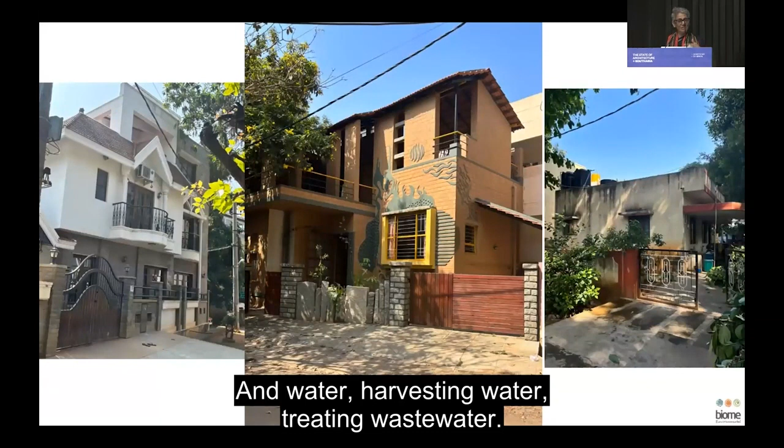But all this done through the tropes of the mainstream, making estimates, creating a tender document, creating bills, all that for materials which were not available in the CPWD and PWD manuals. So everything we had to almost invent ourselves. And at the same time, walking the talk. And that happened through building our own house. That was helpful. That's where all the experiments happen, and they still happen. So we call it a lab for life.

And then conversations with the future home owners, home builders. And one of the things that really helped, because walking the talk, but also it's a woman architect who's going to design your home as well as help you build it. So coming with a team to build, not saying, oh, I'll design a mud thing, but I'll ask who can build, I will find out workers or vendors. No, I come with the possibility of also building it for you.

And then at the same time, creating a big team of clients who are supporting the project by word of mouth, contractors, masons, electricians, plumbers, and now a team of well diggers. So in 30 years of practice, with now an office of 30, we have built about 40 lakh square feet. You know, everybody asks how many, and everything is in this lakh of square feet. So we thought we should also put in the number, and it comes to quite a bit. So we're chuffed, yeah.

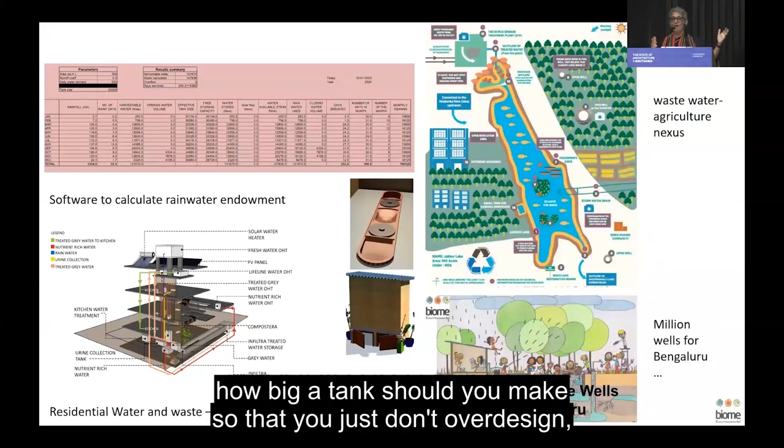But it also is along with water, designing for water for homes, for parks, housing, layouts, or connecting the city to the hinterland, taking the treated water from the city to Kolar, about 100 kilometers away, filling up lakes and using it for agriculture. And in all this, you had to create ways of doing it. And so here is a software to calculate for rainwater harvesting, how big a tank should you make, so that you just don't over design, you don't under design, or you design a WC pan.

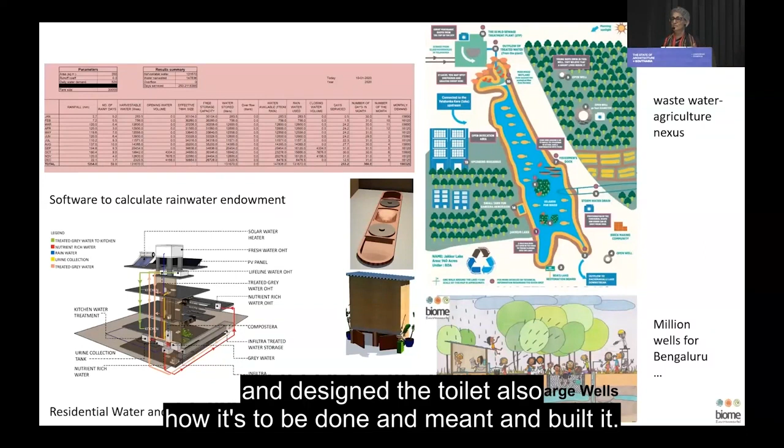So Biome has designed the product, an EcoSan toilet, in fact this was for Kosi flood areas, and designed how it's to be done, and went and built it. Or you get into a campaign mode of making a million recharge wells for Bangalore. So it's these two processes coming together in our practice, which is building with earth, mostly stabilized earth, and working with water. And the reward which we cherish most is when the client says that he has low bills, low water use, and no waste, and it's all because they met Biome.

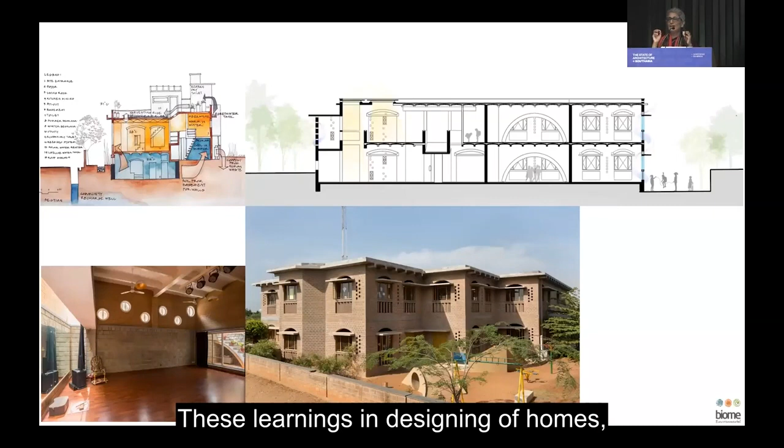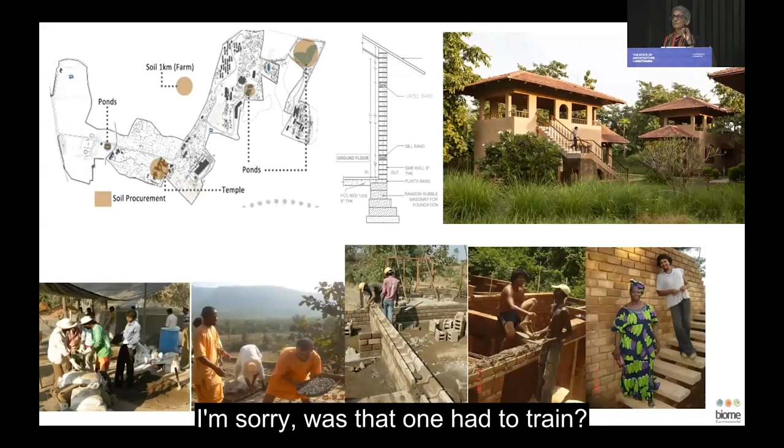But these learnings in designing of homes, we could transfer to even larger projects. So that's a school or any other projects. Every time looking for, how do I use earth for construction? And then larger projects and in different geographies. So Palghar in Maharashtra or Port Harcourt in Nigeria, building with earth. But what it really required all the time was that one had to train. Training was the essential aspect. You say that you will build with earth. Now you've built a base that says build with earth, but then how do you translate it on ground? And for that, we had to go to the places.

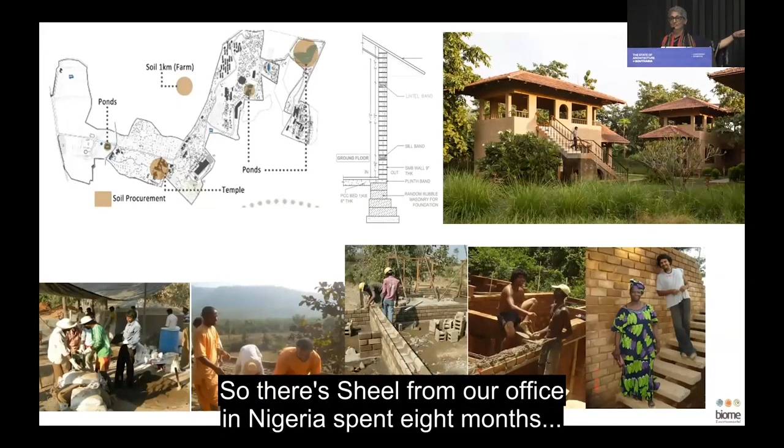So there's Sheel from our office in Nigeria, who spent 8 months training Liberian migrant labor how to make mud blocks and then build there, leaving a legacy. Now we have a contractor there who builds other buildings, but with earth.

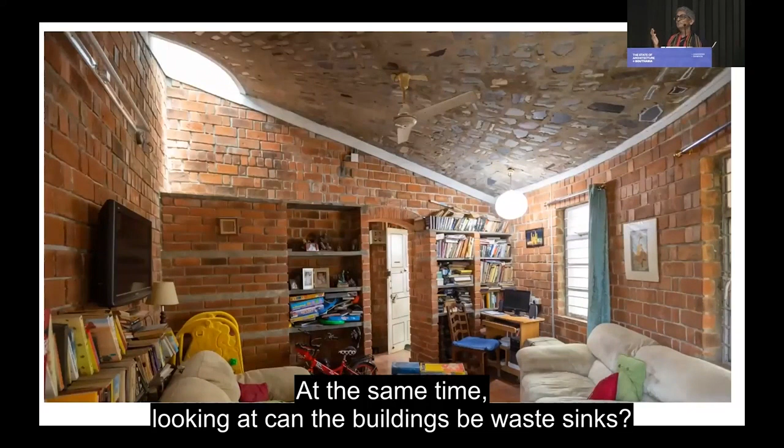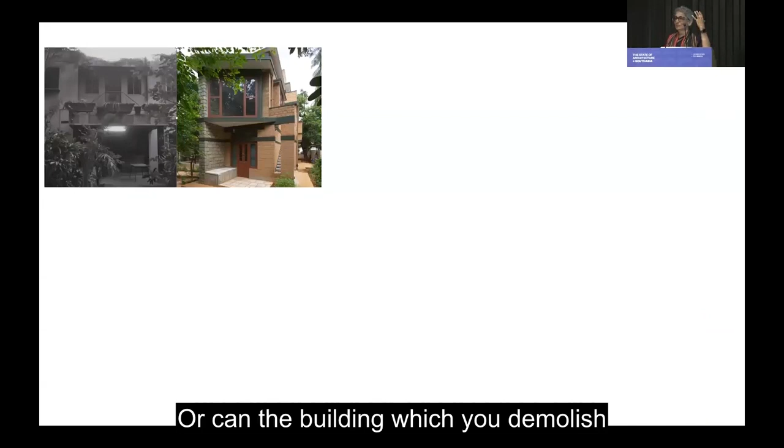Or can the building which you demolish itself use its own waste for structural purpose?

I'm sorry, my animation is very bad. Huh? I thought I learned new tricks.

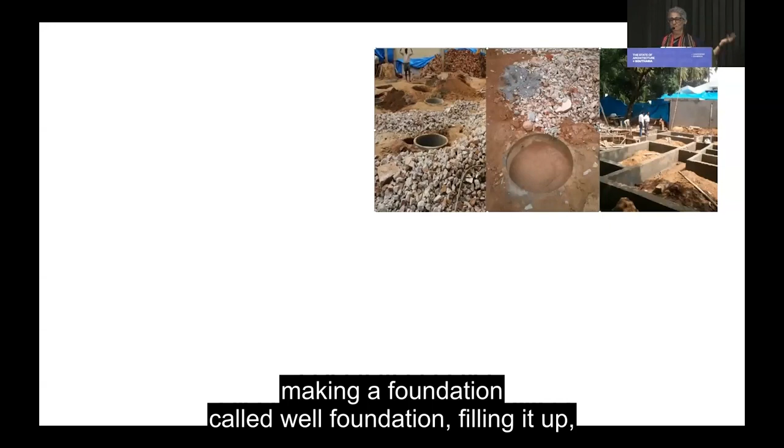So using the construction debris as a structural material, making a foundation called well foundation, filling it up, and then making a grade beam above it and making the building. So in fact, the stone walls which you see are the earlier buildings' stone foundation. So you get a very nice facade, you get to use the same material and save costs.

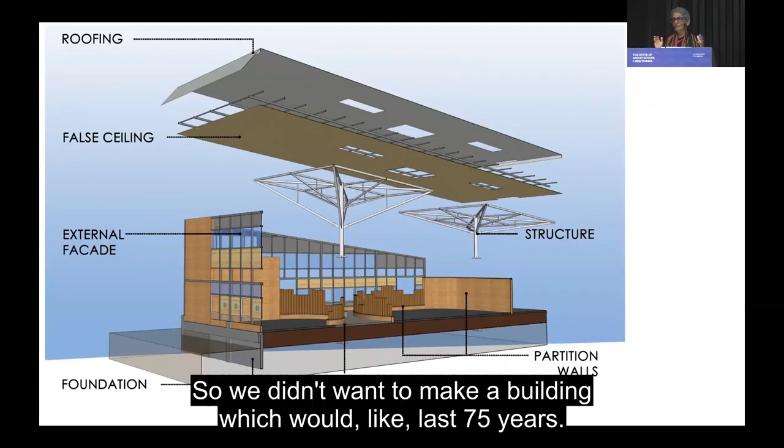And then looking at, can we make a building for being a quarry of the future? So this was a project where the land was available for just 5 years on lease. So we didn't want to make a building which would last 75 years. So can we make it so that every unit can either be removed, reused, or the whole building can be transported in pieces and put up somewhere else?

This starts with the foundation. The foundation is of stone chapri, which Senthil introduced us to, the walls of earth blocks, and a mix of all materials, aluminum, wood, and also paper. In a school of 10,000 square feet, the classrooms are organic in shape, but to reduce the reverberation, paper tubes.

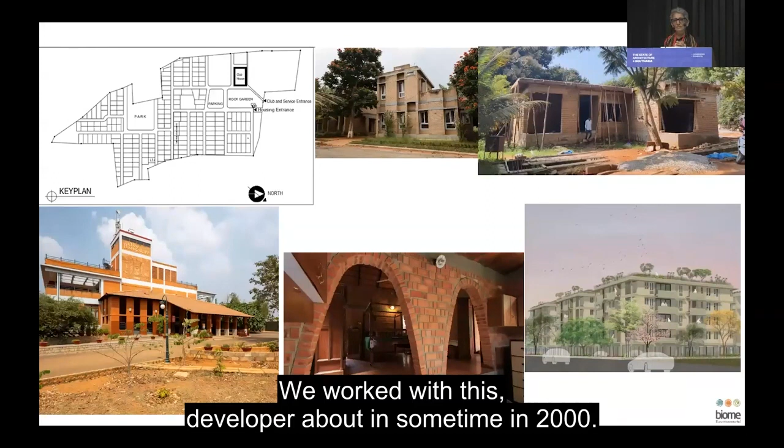So then what's next? And this is in this world of developers one is moving into, which is so well ordered, but is there a space for contingency? And that comes from the experiences. So yes, we worked with this developer sometime in 2000. He couldn't battle the bureaucracy processes. So he ended up cutting the land into Mysore paks. We'd come from the south, so it's Mysore Pak and not Burfi.

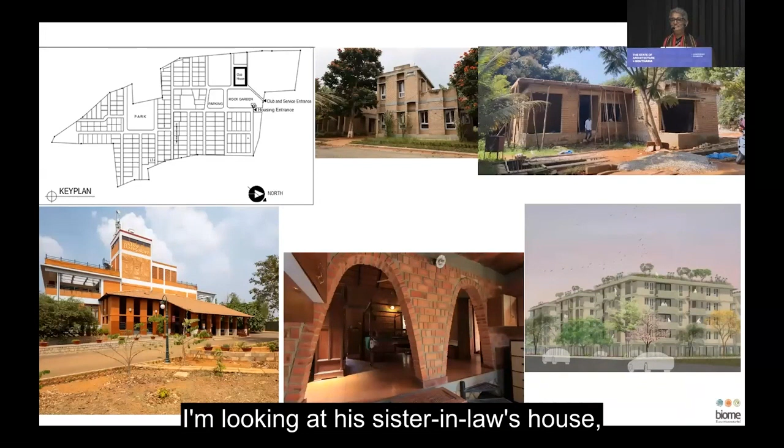But we made his house, the clubhouse, his father's house, his sister-in-law's house, while we also attempted designing apartments for senior citizens. But we were only designing homes in the layout he made, so we made about 20.

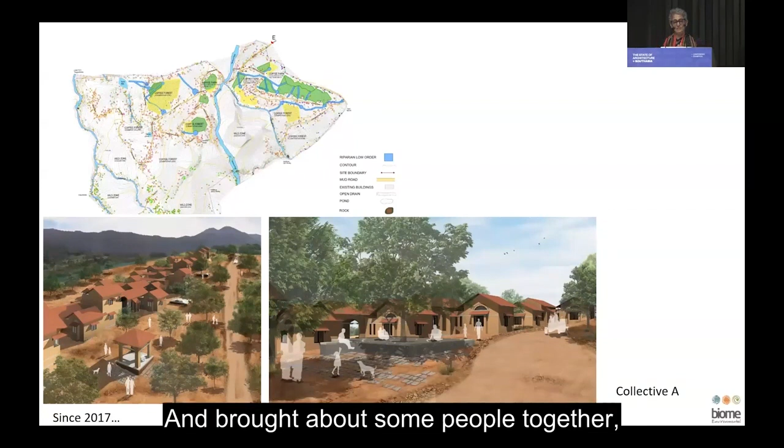But then we came to this project, which was brought together by an environmentalist friend who talked about how do we build in future, how do we live in future, and brought some people together. And they formed a collective. The collective helped in changing the way people thought that a home should be in one particular plot, and then we can do farming.

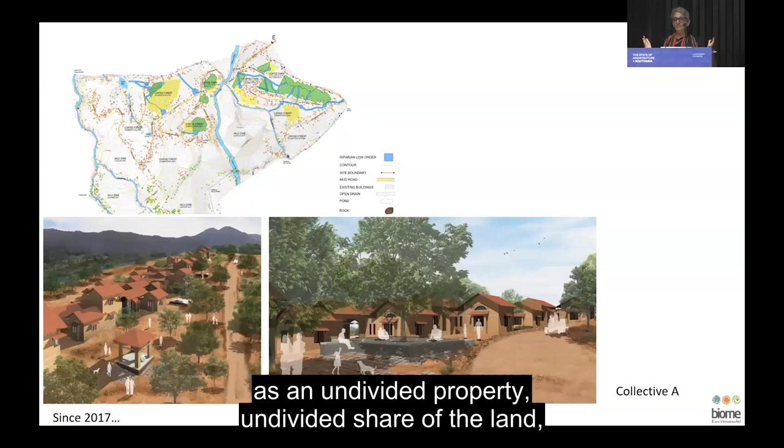But by understanding the site, my colleague Sharat Naik, who is mostly involved in this project, brought about an idea saying let's look at the whole land as an undivided property, undivided share of the land, and you build in smaller parcels so that you have available land for agriculture. But the builder wasn't really that smart. He got trapped in the license agencies, and we have problems with continuing.

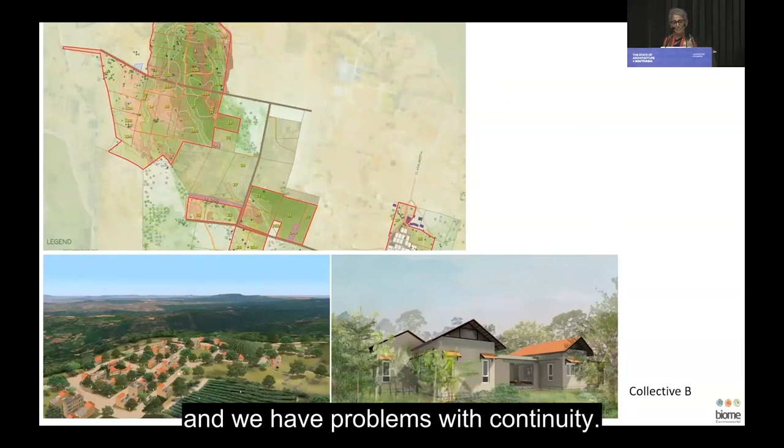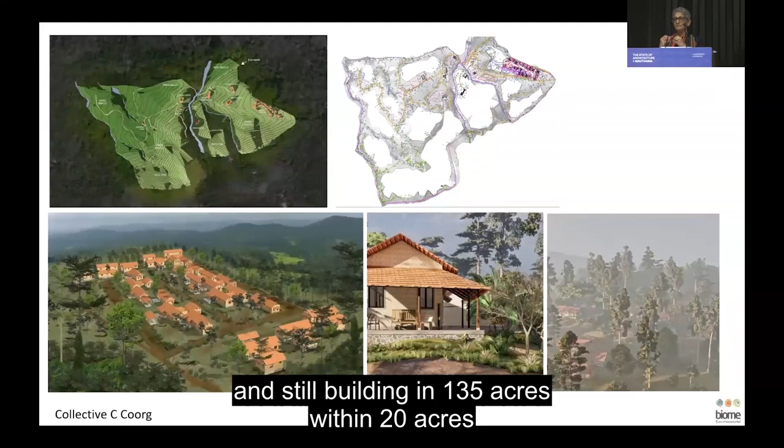So this is the next project the builder is doing. He's smarter. He turns it into smaller plots as well as clusters. And at the same time, we do a project in Coorg, different geography, different context, and still building in 135 acres within 20 acres, reducing the cost of infrastructure.

But a builder or a developer with deeper pockets helps us to design better. He agrees to reducing the whole land use by 20%. So 20% of the plots were reduced, but he has deeper pockets and we are able to do something better. But in all of it, for us, it's always been to teach construction, even the basics, all the way to making a masonry foundation.

But this is the fun part of it. Here, Vidushi, who is involved in this project in MP, knows every little home in the village. This is in MP, where the MP Tourism Board is making one-room Airbnb sort of things in the villages. And we draw the designs in Hindi, and we also know the local village dialect, and Vidushi knows every plumber too, and they call up and discuss. So this is what I feel the most happy with.

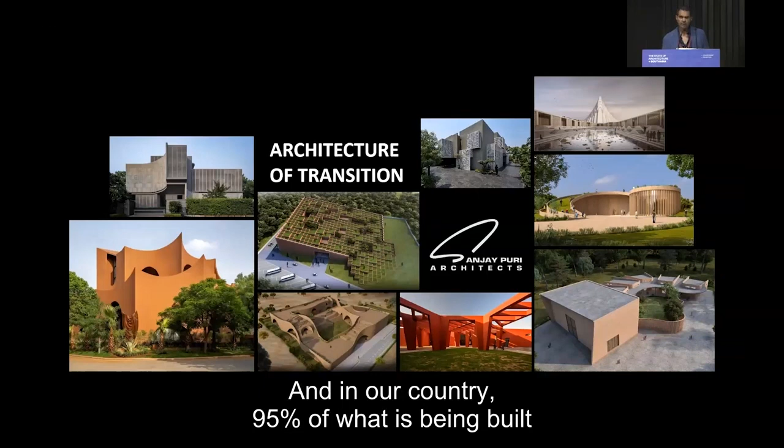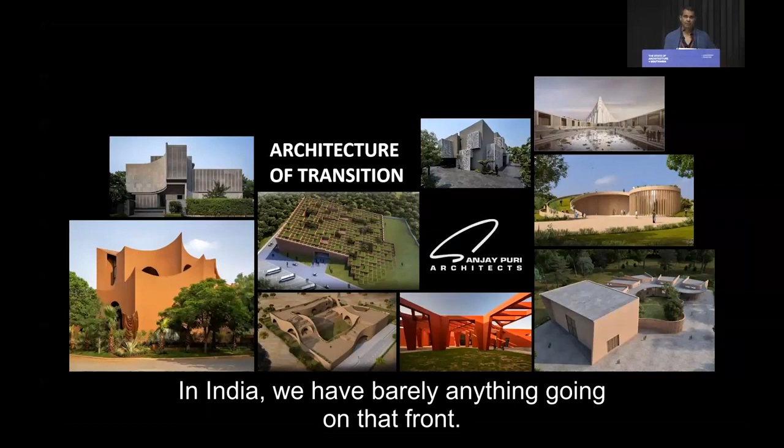So we started our career with private developers. And in our country, 95% of what is being built is by private developers, unfortunately. Unlike most other countries where the governments fund community centers, schools, cultural centers, museums, all of that. In India, we have barely anything going on that front. And whatever else is happening, you know how many loopholes there are to get those kinds of projects.

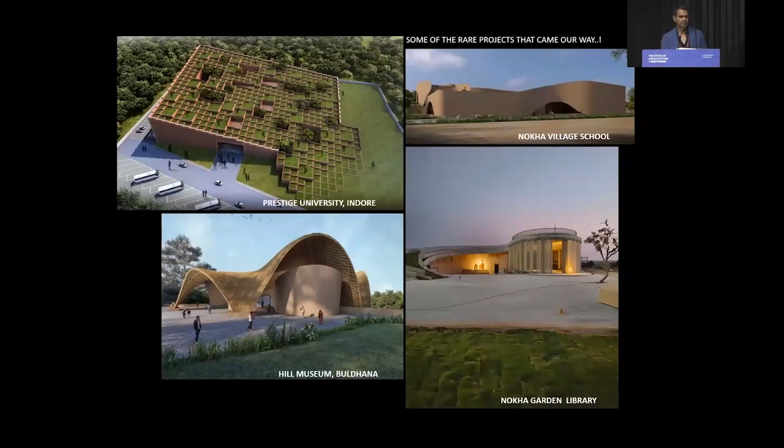So in some cases, very, very few, this would amount to less than 1%, you actually get a chance to do something that is interesting. Are these where we're building a university or a museum or a school?

But largely, it's all private development. So we can leave it at that. That's saying I will be the true architect and not do private developers' work, and I will stick to waiting for that time when I'll get that one opportunity. Or you work with a private developer and you convince them to do something that is unique, something that is different, and something that is more meaningful.

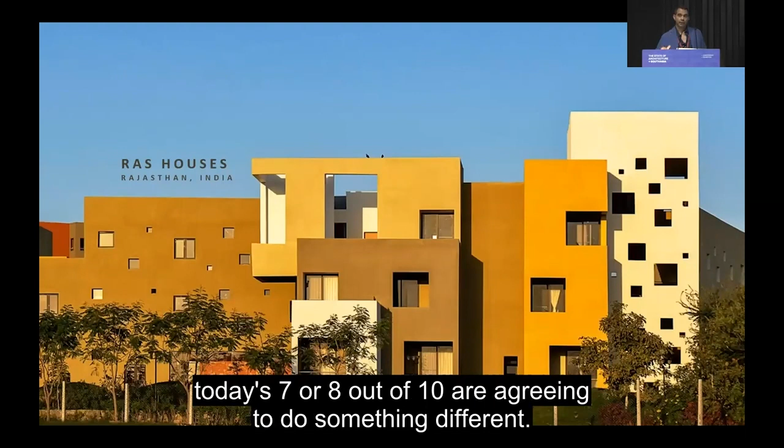The failure rate is very high. At least that is what it was. But after having finally done some projects, the failure rate has gone drastically down. So where we earlier had 1 in maybe 20 who would agree, today 7 or 8 out of 10 are agreeing to do something different. And each one of these projects has actually got us 10 more people like that saying that, yes, I also want something different. So this is one of those projects, Ras Houses, is for a cement plant.

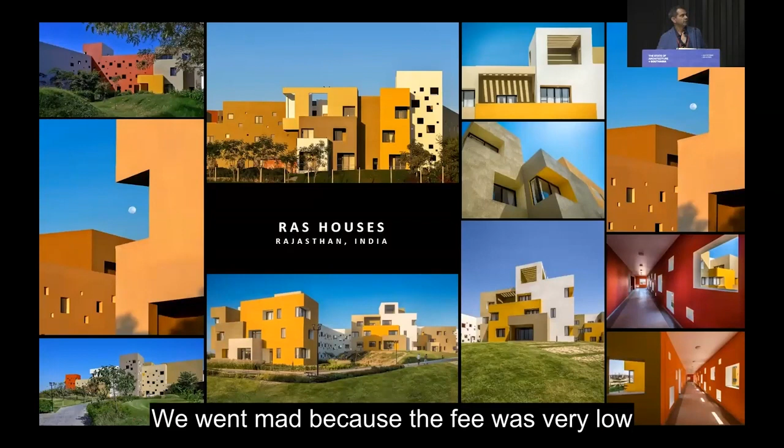It's a housing which negotiates land contours of 16 meters in a 100-acre site. Not a single spade of mud was taken out or brought inside. We went mad because the fee was very low, because they expected that you'll do a single unit and then you'll repeat it. And we told them no. In fact, the first call we got from the engineer was, can I start leveling the site by the time we make the drawings? So we said, no, please don't level the site. He said, but then it'll become very complicated.

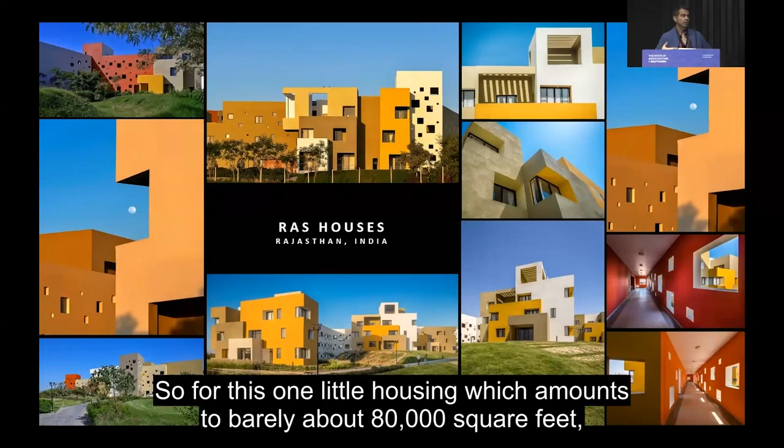I said, that's okay. So for this one little housing, which amounts to barely about 80,000 square feet, within that 100 acres, just one part, we had to make some 140 sections at various parts. So somewhere you enter the ground level, you go ahead, and then there's a lower level. Somewhere you go up. Very, very organic in nature, deep recessed windows, the contours absolutely as they are. And the project came out really interesting.

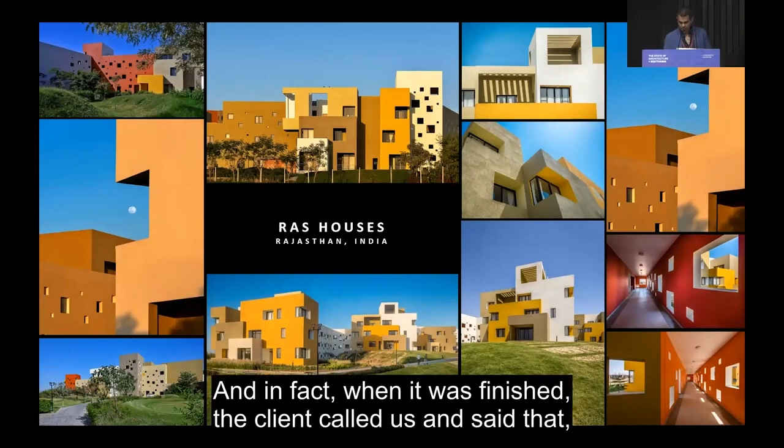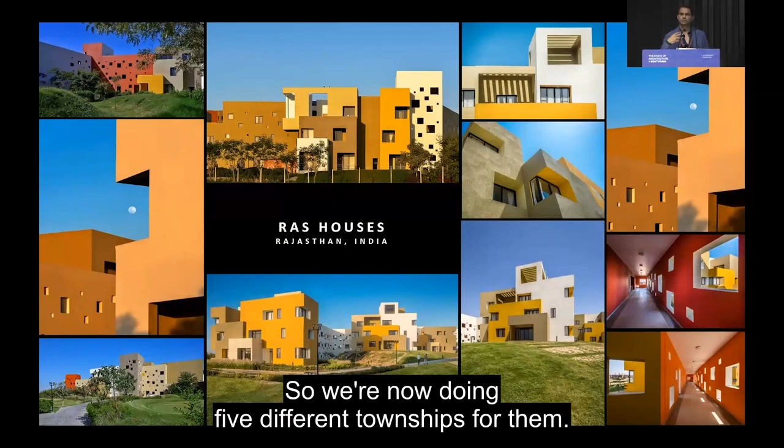And in fact, when it was finished, the client called us and said, ye aapne kya kiya hai, you know? He said, for the first time in a new cement plant, without the school operation, without the club operation, people want to move there. And because of this one little thing, they got convinced. So we are now doing 5 different townships for them. And in each case, they are allowing us the freedom to go beyond the cookie cutter building and make something new.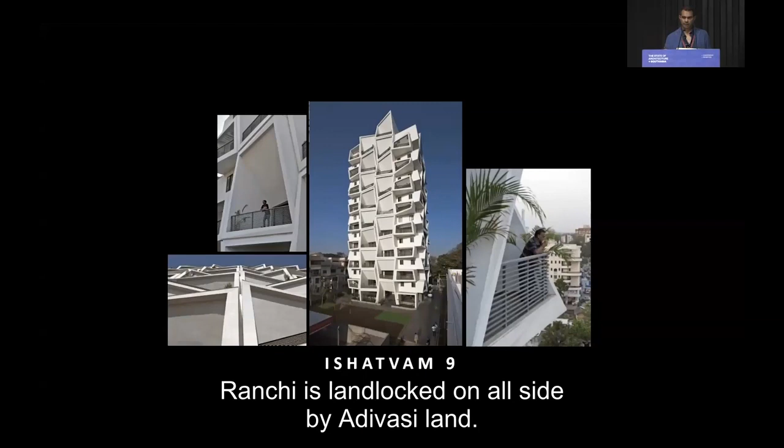This is another project, very small plot, only 2000 square meters. And in this case, we were lucky it was a new developer. So he said, "What do you propose?" So I said, "I've been coming to Ranchi." This is in Ranchi, small city in Jharkhand. And I've seen a lot of these residential buildings which are unoccupied. And I've spoken to people. I said, why are these buildings unoccupied for 10 years? Now, Ranchi, unlike most other cities like Delhi, which is just growing, growing, growing. Ranchi is landlocked on all sides by Adivasi land. So land prices have gone literally 20 times within a span of 10 years in Ranchi. And more than that, it's not available anymore.

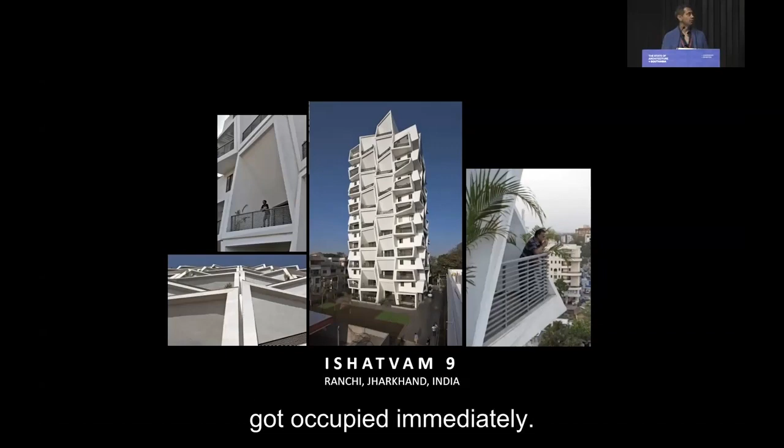So this guy has a small plot. And I said that you're making buildings like Delhi, Bombay, Hyderabad, Bangalore, which don't breathe. Sorry, it's not all. I'm just saying general. 90% developers make buildings that don't breathe. So I said, here you got to make an apartment where every single room opens into 24 feet high terraces. And that's what made the difference. This building, unlike those which remained unoccupied, got occupied immediately. And the balcony where this guy is standing, he was the first occupant of that building.

And he gave this honest feedback, which I still remember, saying that, हम 3 साल से बिल्डिंग देख रहे थे. We never found anything that was open. It's the first time we found something that is open. So I bought 2 flats instead of 1, and I've connected them and made a duplex.

So people think that this is an elevational thing, but there is this twist which is done for a reason to each window frame. So what happens is, in a small plot, you can't actually create terraces because the building will go out of the site. So these balconies, by their twist, are half shaded, half open. So you have the choice from your room to stand in the sheltered part or go out in the open part. So it's a balcony that doubles up as a terrace.

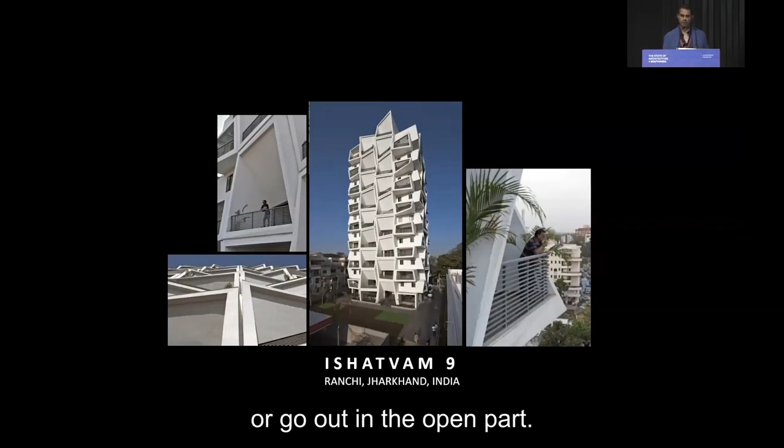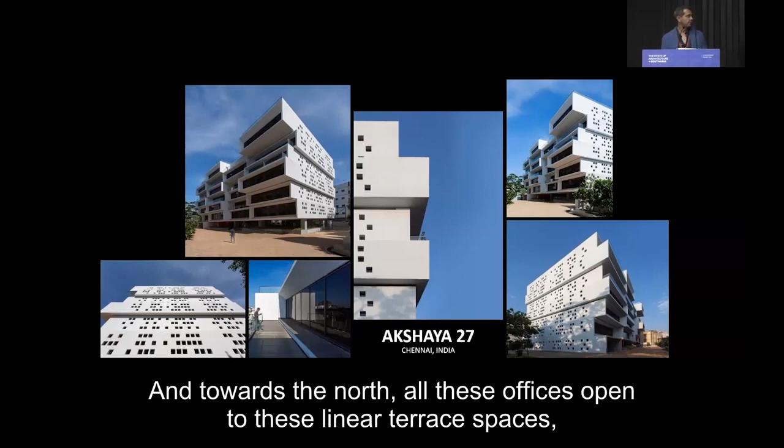This is another case where a real estate developer from Chennai wanted a glass office building. I don't know why everybody wants to make glass office buildings, trapping heat, increasing air conditioning. So the entire service core is taken on the southern side, and towards the north, all these offices open to these linear terrace spaces. And we had a lot of arguments where initially he said, why are you making terraces in office buildings? Nobody does that. Nobody's going to use it. But this office building has been very successful, and we are now doing 3 other projects for the same client, who has now opened up still further and said, now make bigger terraces if you want, because we realized that people like this.

This is another case where the client was a developer, so it's not a hotel person, it's a developer. So developers think very differently. I want to make a hotel, this will be my first hotel, but I want a very simple building, very clean, box windows. And here we convinced him to do a building like this, which again steps up on this terrain. There is a 9-meter drop from the bottom till the top.

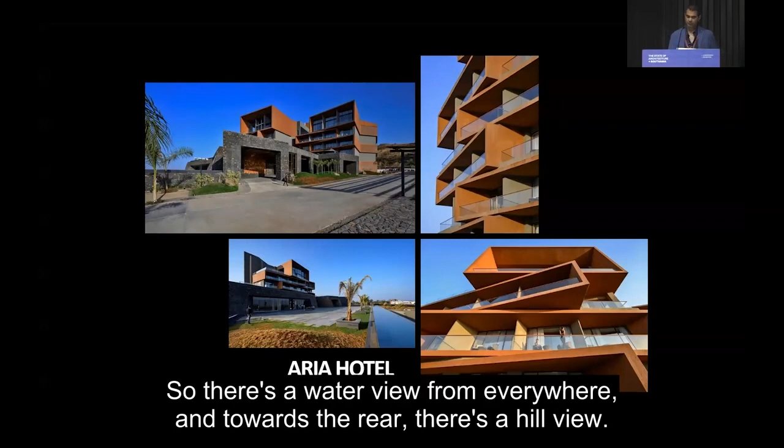Each room opens into 8 feet wide decks overlooking a huge Gangapur dam. So there's a water view from everywhere. And towards the rear, there's a hill view. We got the most sustainable hotel design in the world award for this. 40% of the walls are made in local stone. 55% of the building is non-air conditioned. And out of the energy that is used, 50% comes from solar.

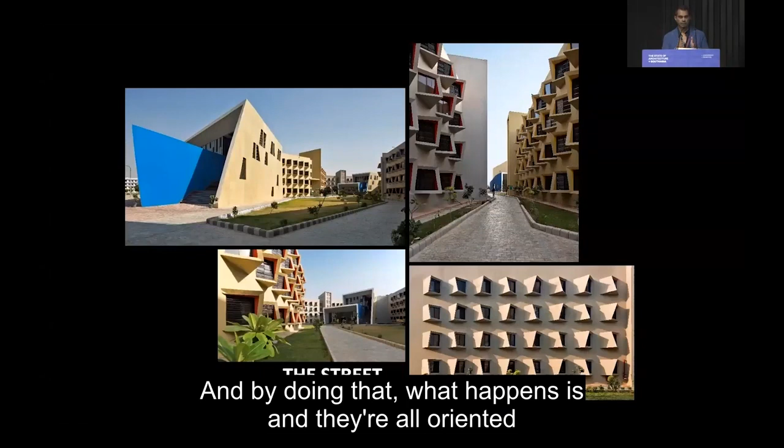And this is the street. It's an 800-room student hostel designed in a really organic way where buildings weave together, they move away. And by doing that, they're all oriented along the north-south axis, so that at any time, and I've seen this, there's always a substantial shadow, like 50% of the garden is in shadow at any time of the day, either on the left or on the right, whichever path you're taking.

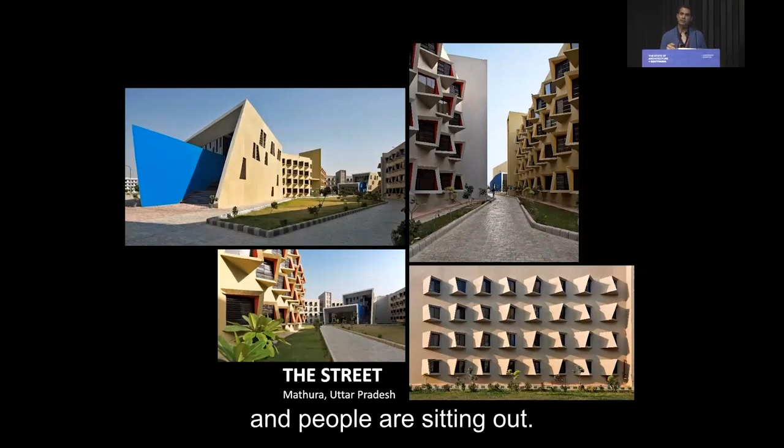And people are sitting out. It's 40 degrees Celsius. People are sitting out in the garden and are able to enjoy it. Of course, for all these, there are multiple projects that didn't happen. Like I said, the success ratio was 1 in 20 maybe in the initial stages. But now we are doing these kind of projects.

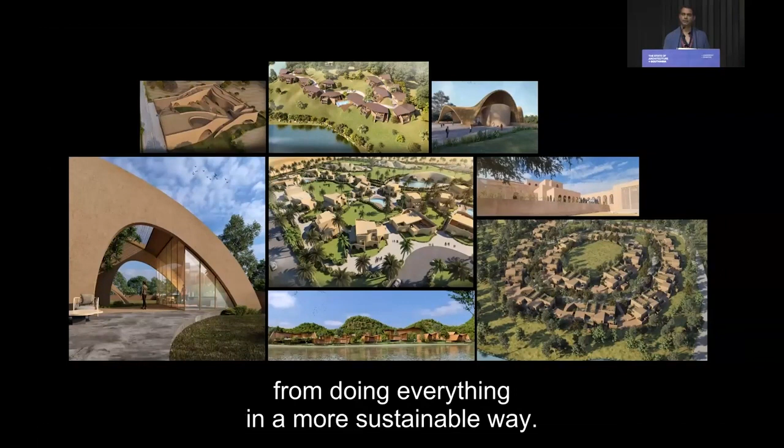So not only is there this whole transition of taking a private developer to make something more meaningful, at the same time, there is this transition to doing everything in a more sustainable way. So these are some of those projects which are now under construction.

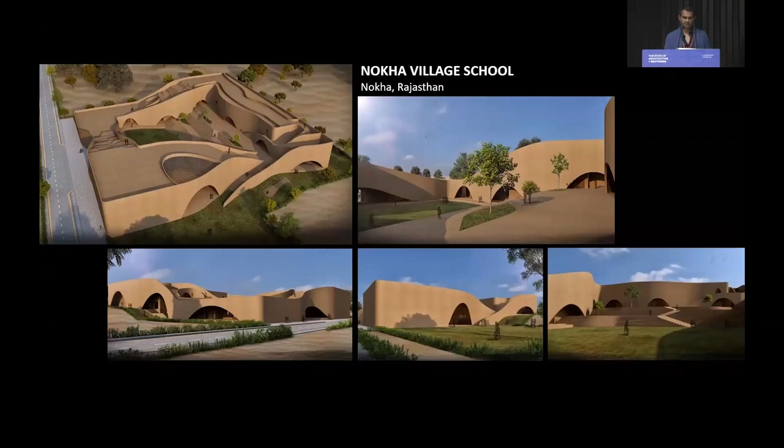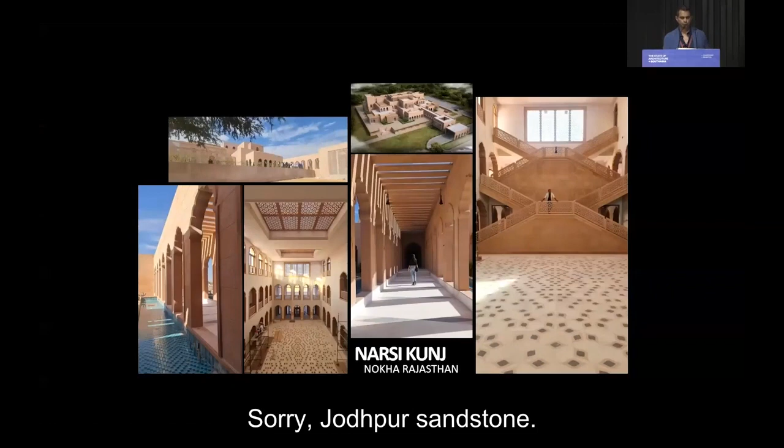That is a house that we did. It's actually a very large house, but it's built totally in local sandstone in Jodhpur. Sorry, Jodhpur sandstone, the house is 35,000 square feet, built with natural courtyards everywhere surrounding the house, a large central one, and a lot of sheltered spaces. And this house is now occupied for over a year. If you walk into this house and it's 35 degrees outside, you don't need air conditioning.

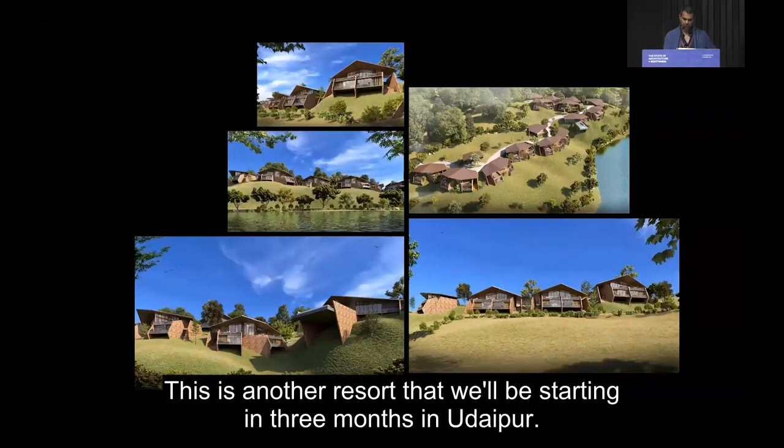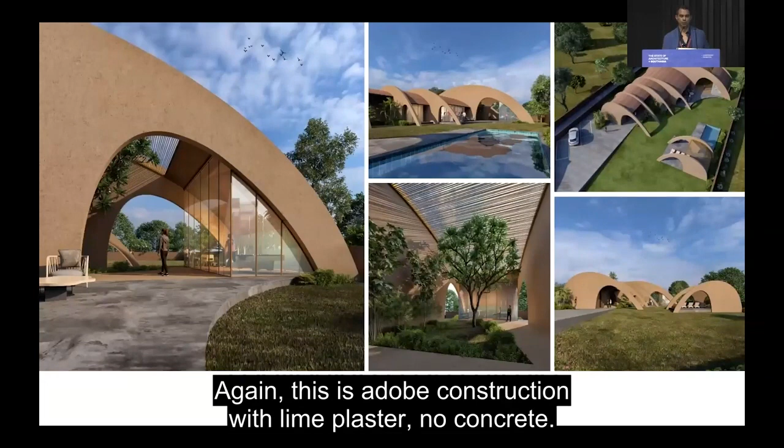So every house is situated on those contours, and these are modules of 6 rooms, 4 rooms, like a villa resort. This is another one that we're doing in Jaisalmer. Similarly, all ground plus 1, adobe construction, lime plaster. That's another house in Gandhinagar we're doing. Again, this is adobe construction with lime plaster, no concrete.

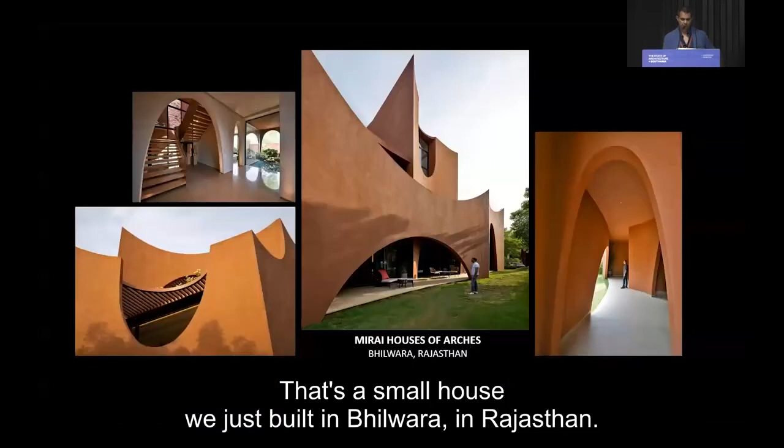That's a small house we just built in Bhilwara in Rajasthan. All lime plaster, all local labor. This one is in Jaipur. Again, a lot of interstitial spaces. And this is the Rajasthan school built in Rajasthan also for this developer. So, like I mentioned, the Ras houses is part of the same project where, because of seeing the success of that, they allowed us to go beyond and do something which was more unique and interesting.

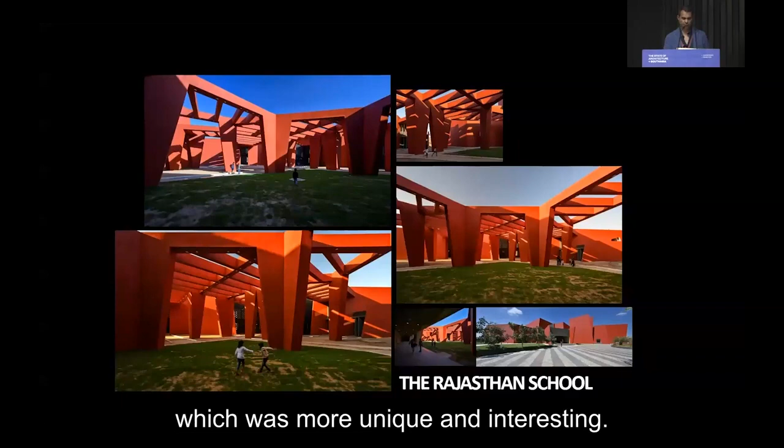So to summarize, private developers are here to stay and they're constantly going to be there. But I think you can turn them around and make something more meaningful, however commercial minded they are. And at the same time, we need to move towards creating buildings with more sustainable materials.

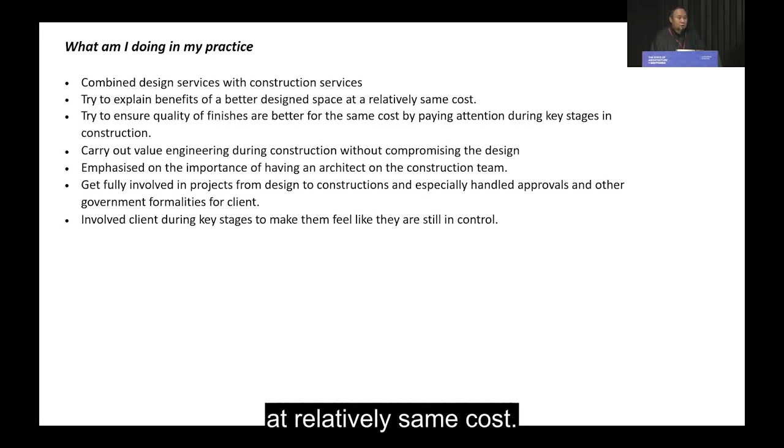So with this, when I started my practice, I wanted to combine a few of these services. I combined design services with construction services. Tried to explain the benefit of a better design space at a relatively same cost. That was very difficult to convince because clients always think that as soon as you involve an architect, then the price is just going to go up. Then trying to ensure the quality of finish is better by just paying attention during key stages of construction. I feel that makes a lot of difference during construction. And then as an architect, we could carry out value engineering during construction without compromising the design aspirations. Like we could use a cheaper tile option or a cheaper stone option without really compromising or changing the design language.

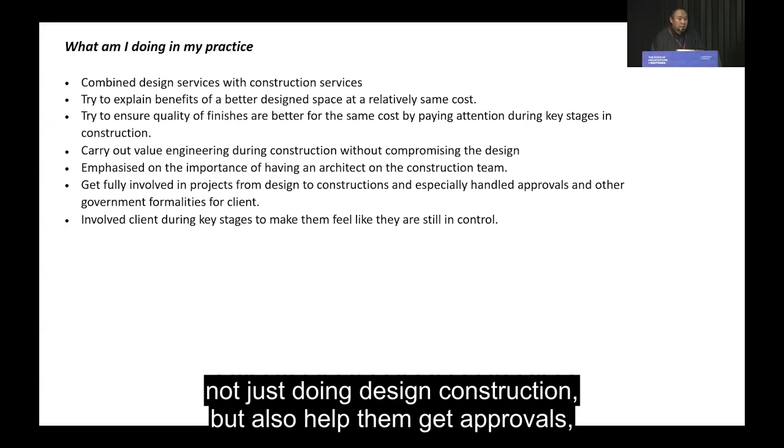Then construction time, the importance of having an architect on site or on a regular basis, I thought that made a lot of difference. So we tried to emphasize on that. We got fully involved in projects with the clients, not just doing design construction, but also help them get approvals, try to understand and make them understand about government regulations and also all these other formalities, because we noticed that some of the architects, just to get projects, were trying to convince the clients that it's very easy to bend government rules and regulations.

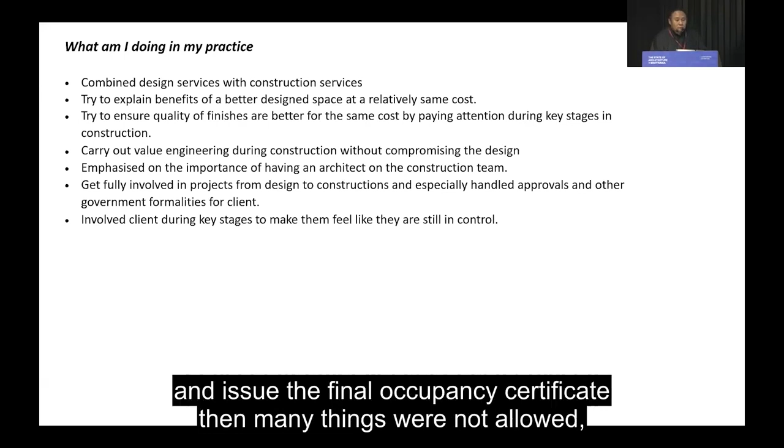And at the end, when the construction was finally over, when the regulators came to verify and issue the final occupancy certificate, the clients realized many things were not allowed, and the clients ended up paying a lot of fines. So we never encourage that with our clients. We try to educate the clients of the existing regulations and the formalities, and within that framework, how we can push the boundaries and make them feel like they're benefiting the most from their project.

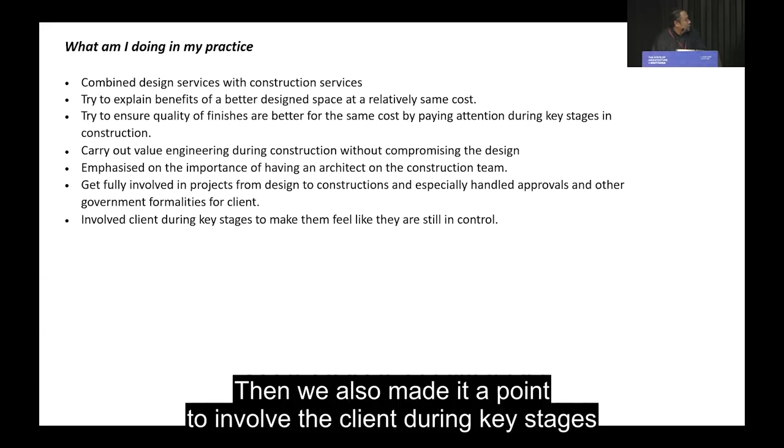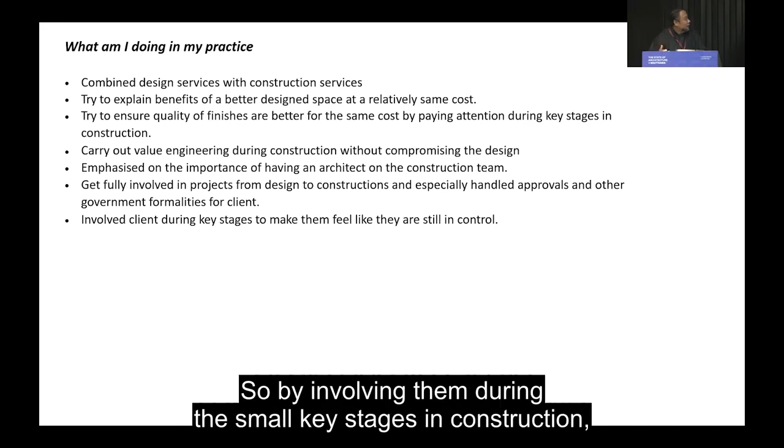Then we also made it a point to involve the client during key stages so that they did not feel like they're losing control when they're hiring an architect to build. So when we ask them, oh, what is your idea of what kind of colors do you want for the tiles or something, small things like that, they get very happy even if we make them select that much. So by involving them during these small key stages in construction, they felt like they're still in control. So that made them feel good.

So I'm going to show a few projects that we took up in the early stages of our practice, where we thought we were doing something different with the client. This is a small bathhouse located in the valley of Phobjikha, about 4.5 hours from Thimphu. This was for an FDI hotel called the Gangtey Lodge. The owner was a lady from Myanmar. She wanted to do a bathhouse.

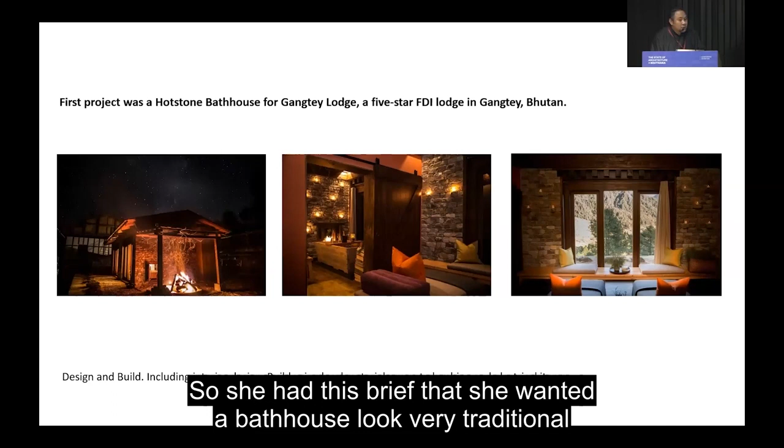It was a very small project, about 10 meters by 6 meters, but she could not find a contractor to do it. So she had this brief that she wanted the bathhouse to look very traditional with stone facades, both inside and outside, and traditional doors, windows and traditional roof. And all the contractors that she contacted were either not interested because the scale of the project was too small, the location was very far, or they were trying to dilute her ideas by saying it's very difficult to do that, so that they would just make their work easy.

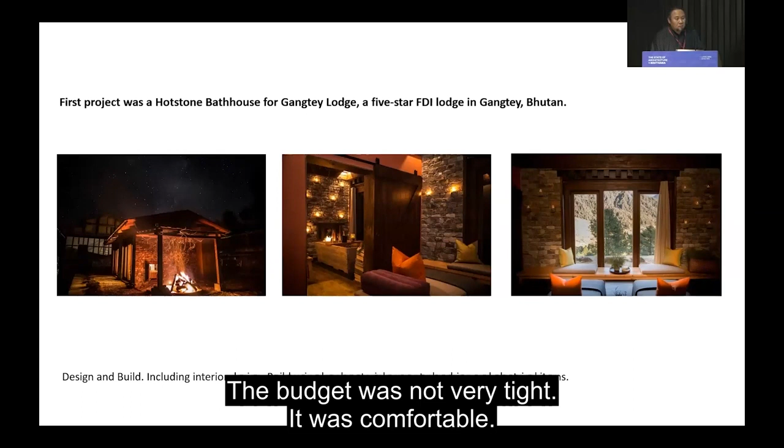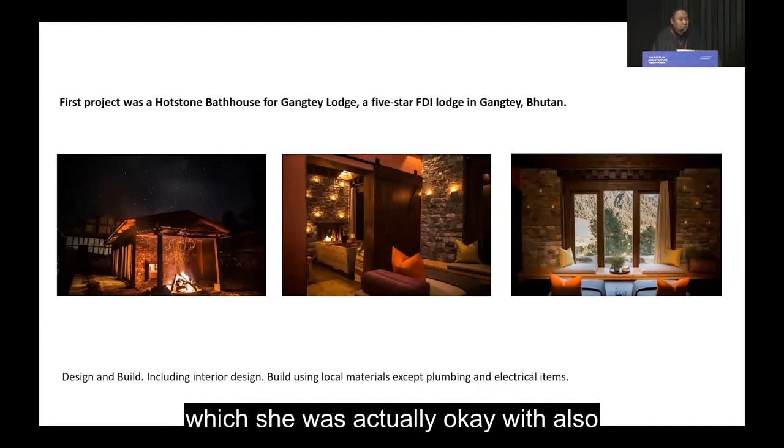So when she contacted us, she gave us a budget and a timeline. The budget was not very tight, it was comfortable. And then we told her that whatever she was aspiring to build was possible. And then we encouraged her to actually stay true to the traditional concept by using actual stone masonry and not just stone facade, which she was okay with, because she was very frustrated, not able to find a contractor. So we insisted that we do real stone masonry walls. It's about 60 centimeters thick. Then all the interiors were also done by us.

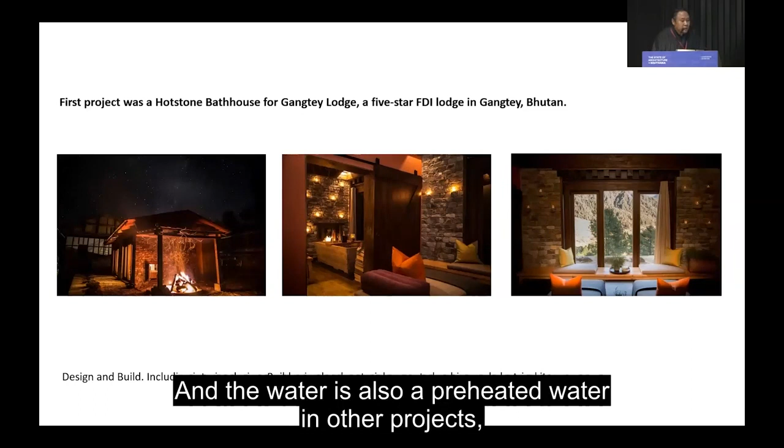We stayed true to the concept of the traditional hot bath, where the mineral stones are heated on the fire. In other five-star hotels, they heat it in the oven and they put it in the water, and the water is also preheated. But here we stayed true to the concept of a traditional hot bath, where the water is completely heated by the stones heated in an open fire. So she was very happy with whatever input we gave, and so that's how we started our journey in this.

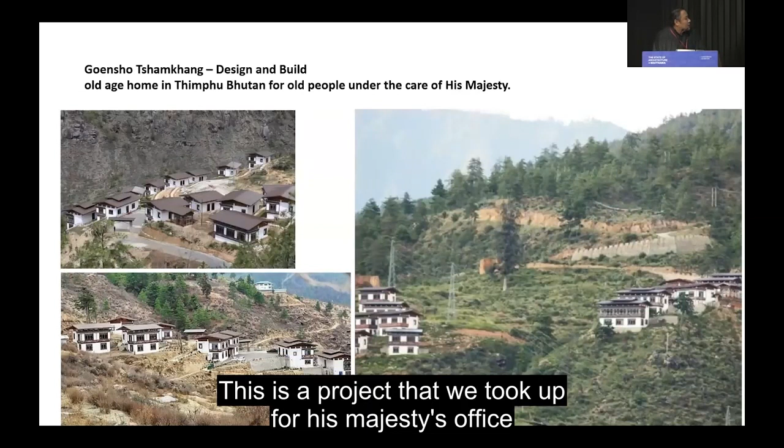This is a project that we took up for His Majesty's office, where they wanted us to build quarters for the elders who didn't have any families and were under the care of His Majesty's office. So they wanted a line building for these occupants, because they were just elders with no family members. So they thought they could do anything. But we came in, we were hired with a certain budget. The whole project cost only about 6 crores.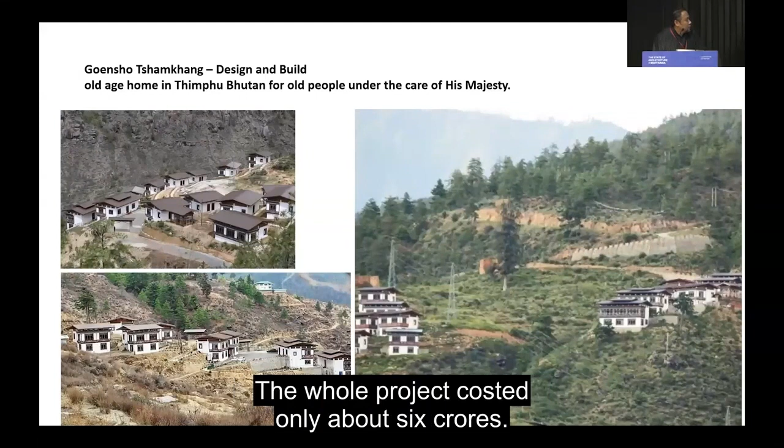And then we decided to do a building, a facility which looked like a cluster of village houses. It took us about 2 years to build it. We used many local materials to build, like the concrete blocks, which were manufactured at a site nearby, timber, doors, windows, roofs, and all that.

This was an FDI resort in Paro. It's called the Spirit Sanctuary. The investor is a Dutch man, and his sons, who were based in Vietnam, did the design. We were initially involved as the local architect, just doing the drawings to suit the local guidelines and get the approvals. But as we got involved, they asked us if we could do the project management services also. So this was the first time that an FDI hired a completely local project management team. And we were there for 2 years. The contractor was a very senior contractor, so it was quite a challenge getting things done with him.

This is a 4-star hotel in Thimphu, 46 rooms. And this was a fairly large project in 2016-17 for a local individual to give to an architect to design and build. So this was also completely design, build, interiors, everything by us with that scale of budget. So we were able to convince the client, who's also my father-in-law, but it was not very easy to convince him. But yeah, so these are the projects.

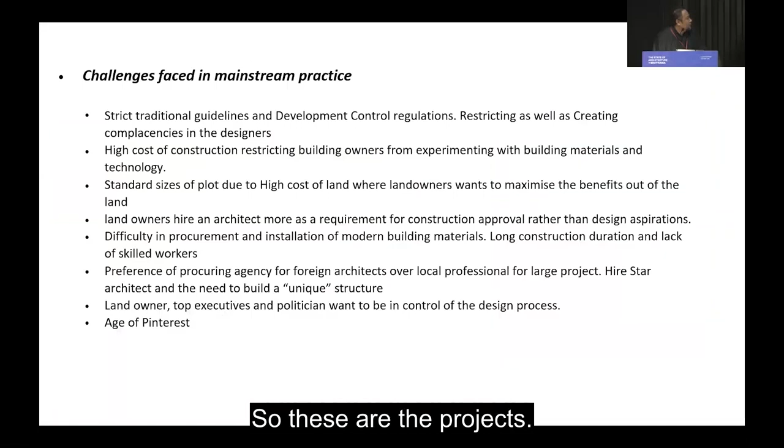Some of the main challenges that we face are the strict development guidelines and regulations. It's restricting, but it's also giving young architects an excuse to just copy paste, which I think is not right. High cost of construction is restricting building owners from experimenting.

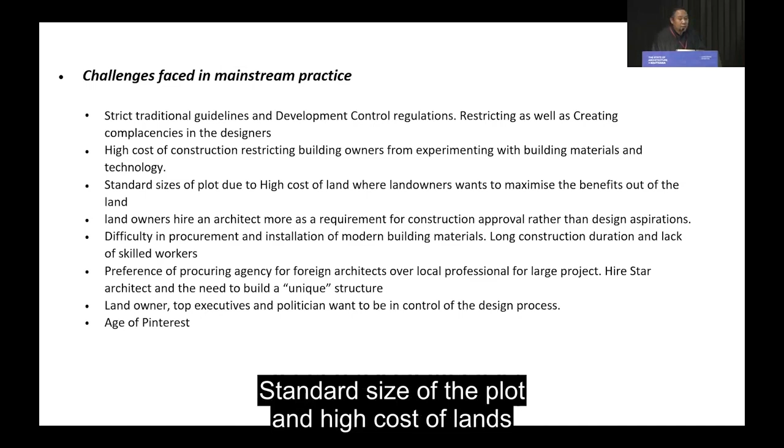Standard size of the plot and high cost of land, where the buildings become very monotonous. Landowners end up hiring architects just to get their drawings approved, and then they do whatever they want. They don't have much design aspirations. Difficulty in procurement and installation of modern materials, lack of skilled labor, long construction times, all deter, making people do the same thing over and over again.

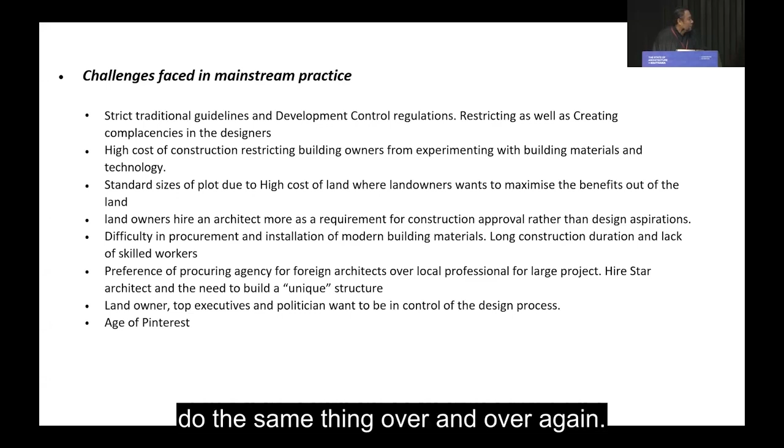Preference of procuring agencies for foreign architects over local professionals. Need to build something unique. That's a word which is used very often in Bhutan. Landowners, top executives, and politicians want to be in control during the design process, which ends up diluting the design language, and of course the age of Pinterest, which is crazy.

So in the beginning of the conference, I had a whole like 7-8 points written on how I'm going to shift the mainstream, but the last 3 days listening to everybody, I realized I didn't know anything. So I kept this part empty and thought that, for a small country like Bhutan, the mentality of the architect was playing a very important role.

The architectural students which are coming out, yesterday night, Bimal was saying something very nice, that the schools are producing apprenticeship and not really professionals. I think that really resonated with me. And I think that is how a young architect should feel, but they're not feeling that way right now.

Young architects who come to Bhutan are so eager to start their own practice, want to do the curved buildings and the curved roofs and so many things so early on into the career without understanding materials and all these things. I can see all the presenters over the last 3 days. You guys have devoted so many years of your life understanding these things, but this is what's missing in Bhutan. So I'm going back much more enlightened, and so I'm keeping this page empty.

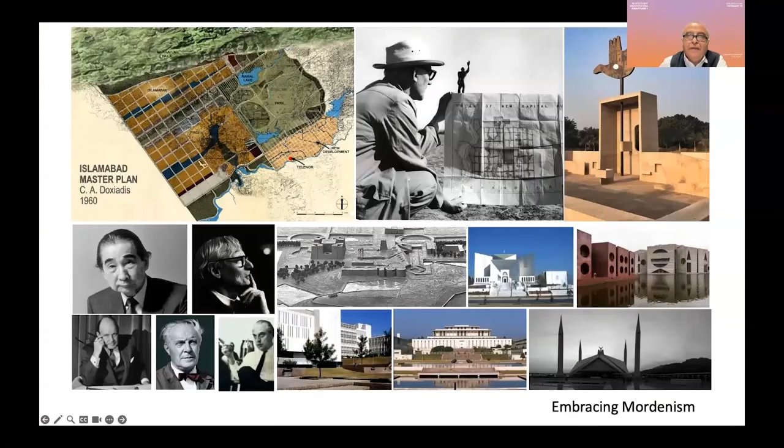I'm here in Islamabad today, and it's so wonderful to be speaking at this forum where we as South Asians, with our shared histories, geographies, cultures, can come together and talk about our practices and the transitions which move us forward. I was born in a post-colonial world where the euphoria of independence was waning. I, like some of you, have witnessed some definitive transitions in the subcontinent, which came to define our histories, urbanity, and architecture. The first such move was an embrace of modernity.

Our political leaderships attempted to de-link us from our histories, social fabrics, crafts, and traditions in the hope of creating egalitarian utopias. We saw Corbu, Khan, Doxiadis, and many other masters come eagerly to make us citizens of an international community. Our governments, people, profession embraced this architecture as the only way forward. Our next transition was a search for nationalism. This is specific to Pakistan, I think, but maybe also to an extent for the region.

And in our case, we went through a regressive political movement which found us searching for a long gone Islamic architecture, and where we started working and developing prestige postmodernistic gestures. The next transitional move in our urbanity came in the form of the Aga Khan Awards and a process of critical discourse which looked at regionalism in a more holistic manner.

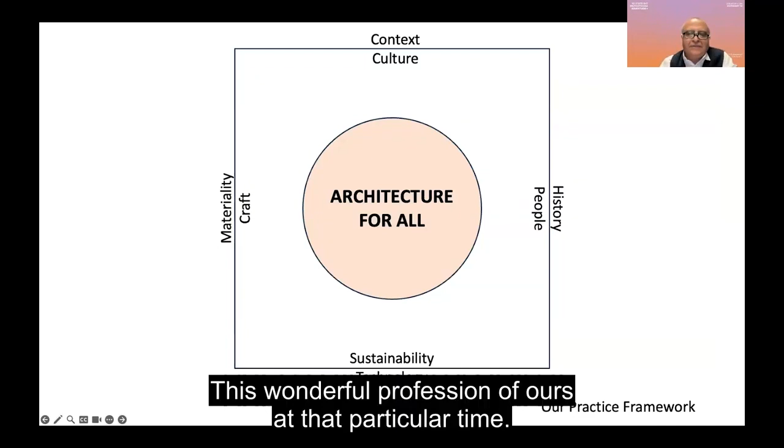We saw Hasan-Uddin Khan, Charles Correa, Hassan Fathy, and many others lead us to better understand the true meaning of our vernaculars, history, and architecture. This was a time of self-discovery, awakening of sorts. Luckily for my generation, this transitional move also overlapped with Mehboob and myself entering the profession at this time. So I guess we were really lucky to be entering this wonderful profession of ours at that particular time.

The mantra of our practice today is really architecture for all, which is, I'm sure, a goal for so many of us. We, in our practice, wake up every day attempting to seek this particular goal and working within the framework which I've put in a slide in front of you, and we can talk in our panel discussion later about this.

I just wanted to come out and say that, working in Pakistan and realizing the urban and rural degeneration around us, we felt that our practice needs to work 50% within the parameters of what we might call mainstream. We work with developers, we work with corporates, we work with all kinds of clientele, and you'll see this in our work. While with the other 50% of our time and our energies, we try to reach out to the people who need our services the most, but who really don't have the means to pay for our services.

And so, you will see a lot of red dots and a lot of green dots. And that's how the difference in your minds you will begin to associate with.

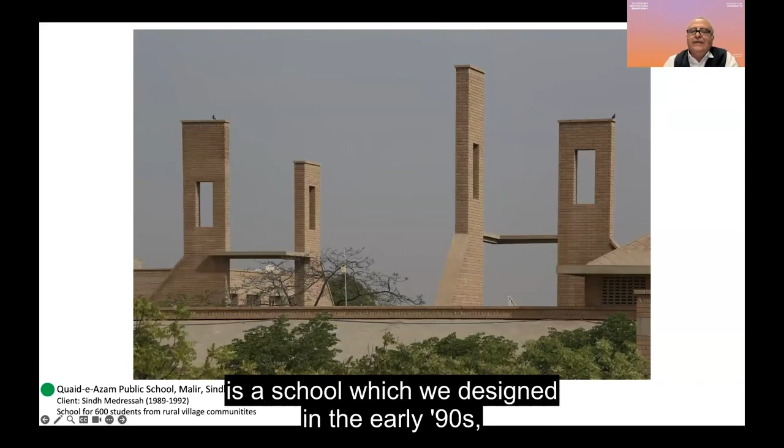So the first project we'd like to share with you is a school which we designed in the early 90s, which caters to villagers who had actually never received any education, and they wanted to send their children to schools and make sure that they get educated. So the initial funds or the seed money came from these villagers, and then they went out and sought donations.

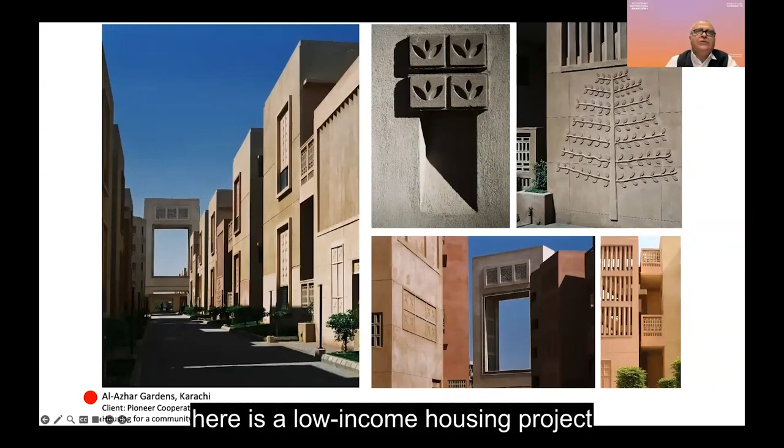So we, by necessity, worked with these villagers, with the communities, and started to understand the nature of this development in a very interesting way. We then have gone on to work with a number of our other clients. Here is a low-income housing project in suburban Karachi. Then we've done some work in Afghanistan. This is a provincial hospital, which again we did for the Aga Khan Health Services.

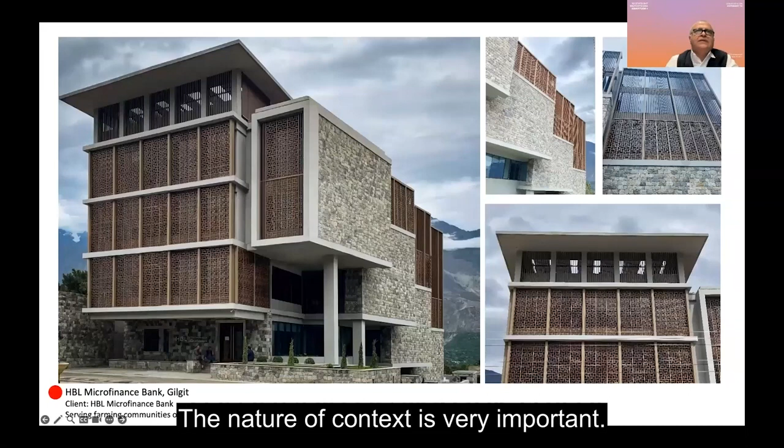And as I had mentioned earlier, materiality to us is very important. The nature of context is very important. And our client base is very diversified. And I think South Asia allows us that diversity, from literally low-income housing to the high-end projects. So we do them all.

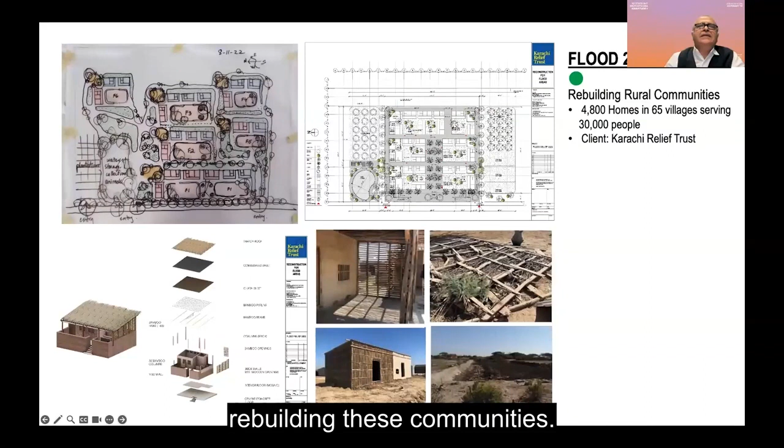Here, as you might have read, in 2022, we were hit by very bad floods. And we are right now in the process of rehabilitating, rebuilding these communities. And we're able to, with the nature of our practice, reach out to a very large spectrum of our population. And we've been doing this for quite some time.

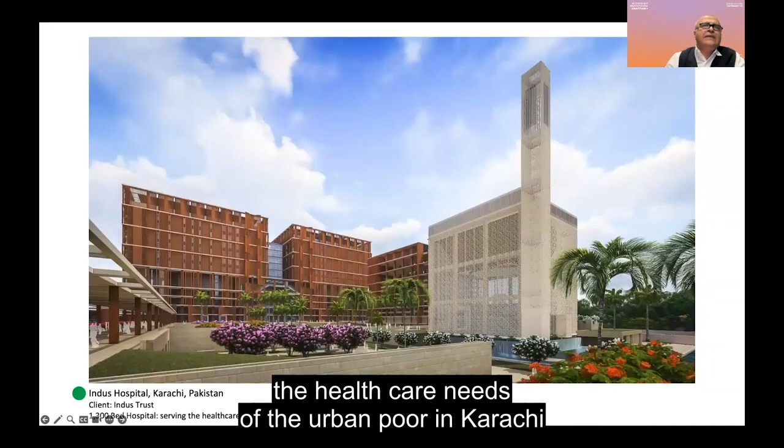This is a hospital which has just been built. It's a transplant center. This is one which is under construction in Karachi. And this is again serving the healthcare needs of the urban poor in Karachi, people who by no means can get to basic healthcare needs. So the Indus Hospital provides that to them. And urban regeneration work is what we've been doing.

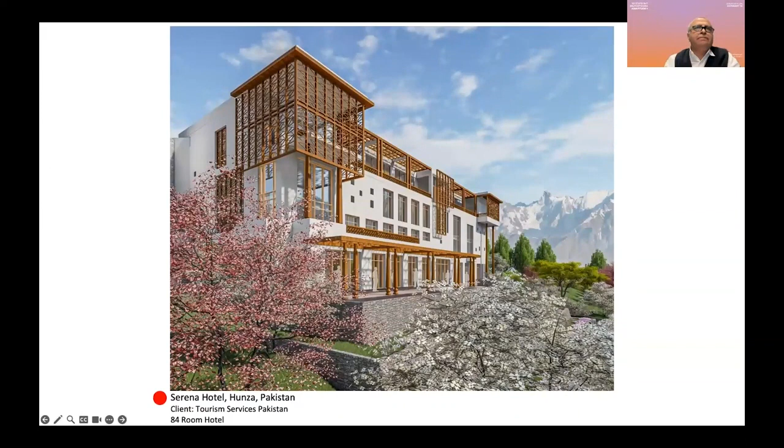As I said, in the high-end spectrum, we work with hotels, an IT park, which we've done up north, and some other work which we've been doing. And then we've got a palette where we do these very large housing developments for developers. This is 1,200 acres, again, just on the fringes of Karachi, and many other developments.

But I'd like to just thank you once again for providing us all this opportunity to hear one another, to share our thoughts, and hopefully to learn from one another, and to see how we move our practices onto the next stages in our lives. Thank you so much.